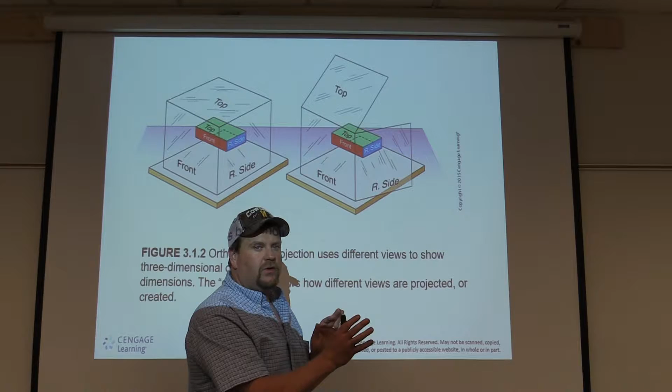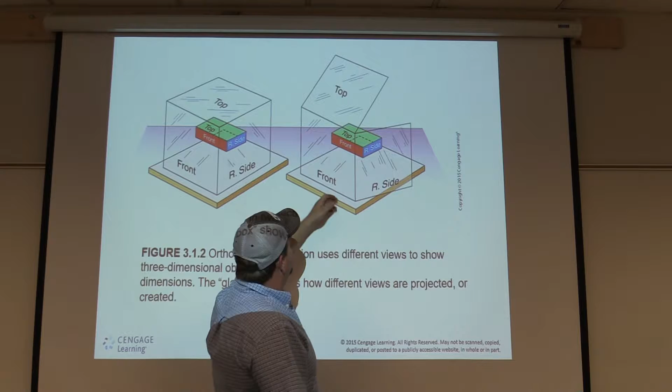Flat dimension like this. We have 3 different views. But now we're going to help explain how we get to that 2-dimensional print. Okay? So that's where the orthographic and the glass box theory comes in. Okay? So the glass box shows how different views are projected or created. As you can see, we have 3 different parts. We have a top, a front, and a right side.

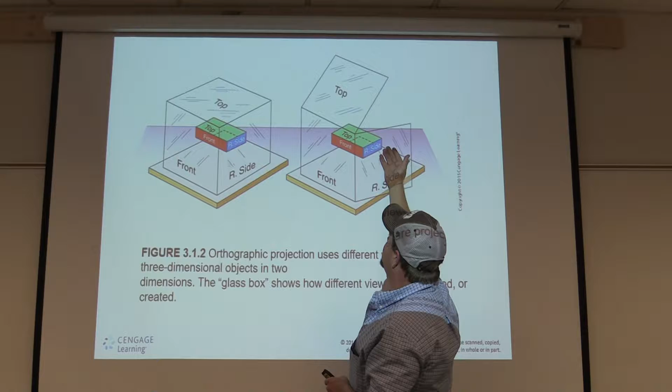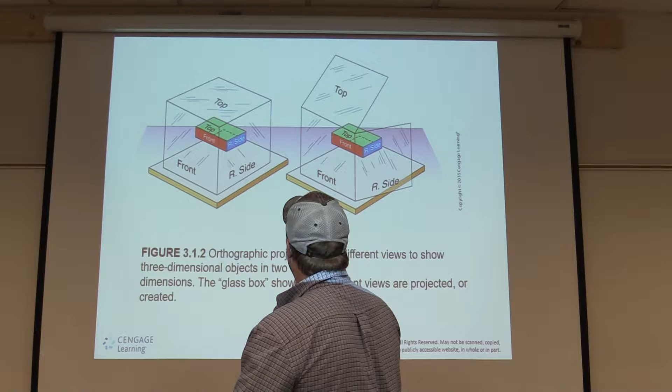So if we were to fold that glass box up, now it becomes 2-dimensional. Okay? And the front will come to the front glass. Your side view will come to this side. And the top will be displayed on the top section. So it's a lot easier to describe that in that manner than it is to sometimes have to turn a print around or have 3 different sets of prints.

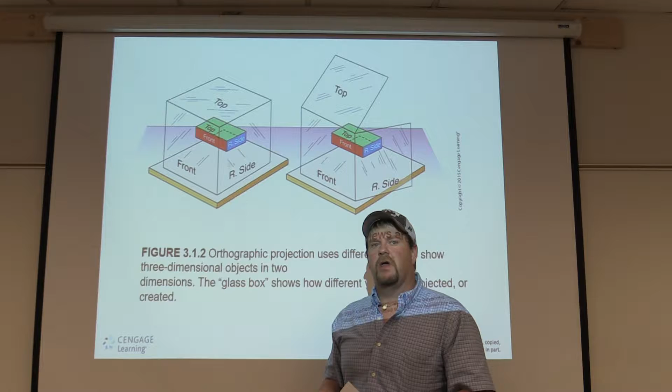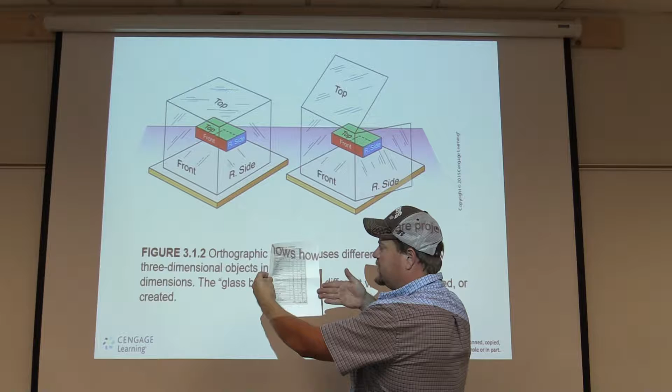Because you might have to look at the top, the front, and the side all together, and if you're constantly switching back between 3 different prints, it can be very confusing and waste a lot of time. So we have this box here. All we basically do is fold it up, so now it becomes 2-dimension, and this piece would fold out the same way as this. Okay? Now we just made it a 2-dimensional piece from 3 dimensions. That's all our glass box is really.

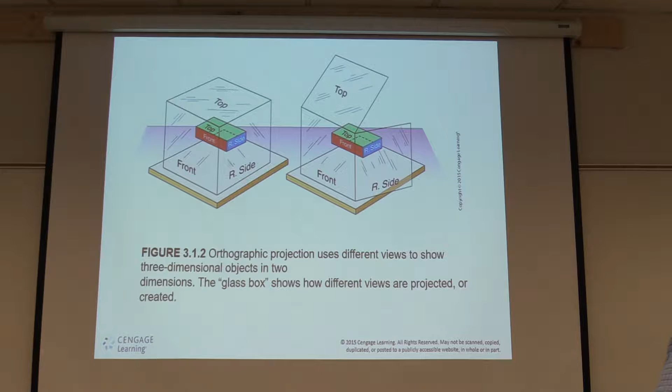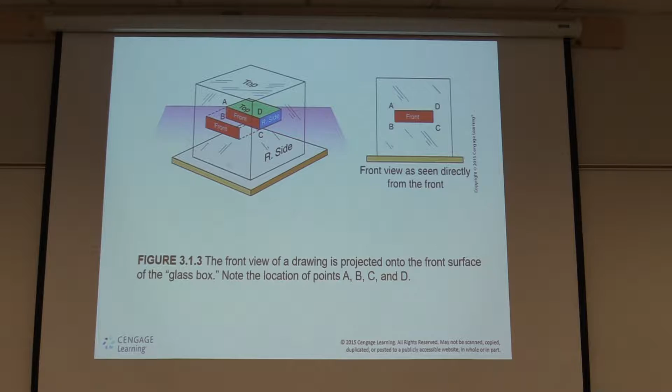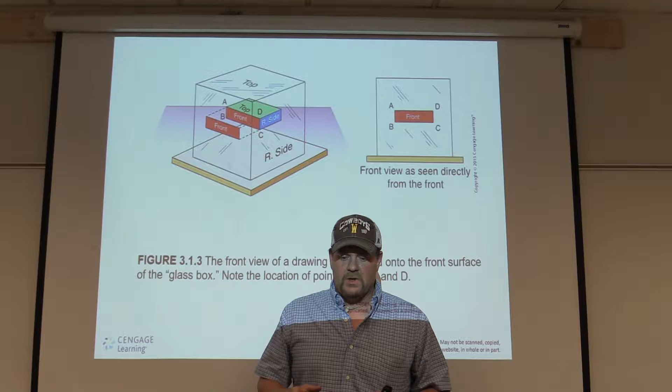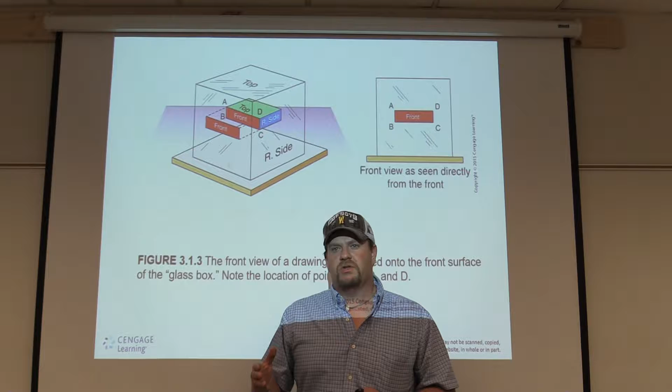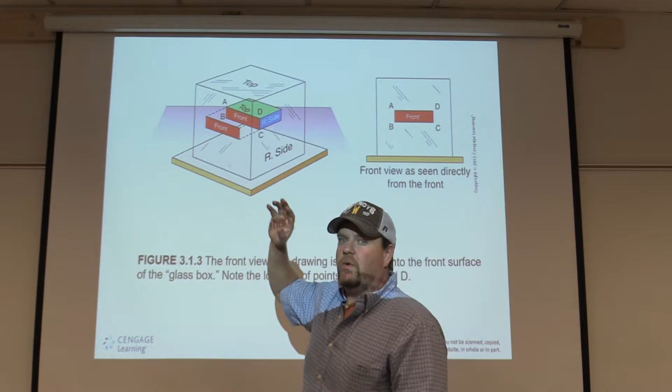So especially when you start reading prints, there's a million different methods out there. A lot of people have their own little tricks and so forth. What I really want you to focus on is just staying consistent. Okay? The more and more you read prints, you'll start to understand different portions of it. So I almost always start in the bottom right-hand corner. I'll read my title block, start making sense from there, and then I will go up and I will start reading. I read my front view first, then my top view, and then my sectional view or my side views.

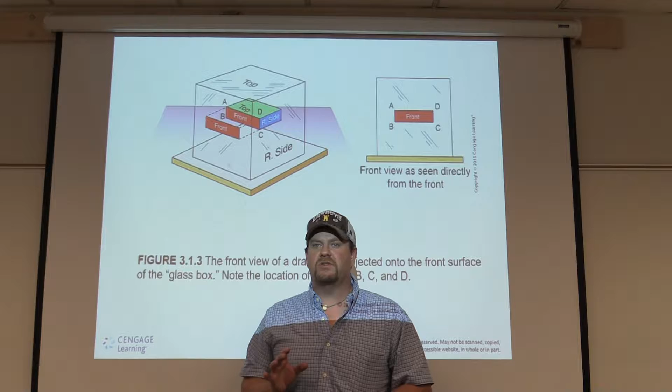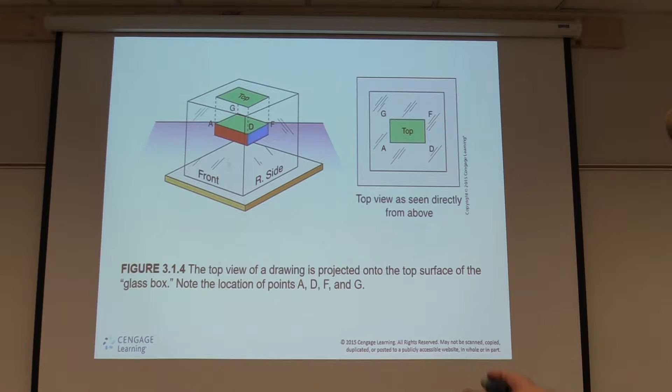I don't really care if you do it side view, then top, and then bottom. What I want you to do is just be consistent. The more and more consistent we are, we create our own habits. And as long as that works for us, that's fine, as long as we're getting the correct information. Okay? Here's just another example of the object's top surface being projected to the top of the glass box. Side, same thing. I think we understand that portion fairly well.

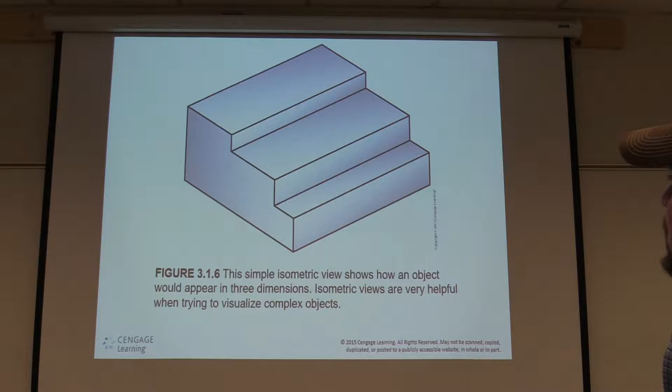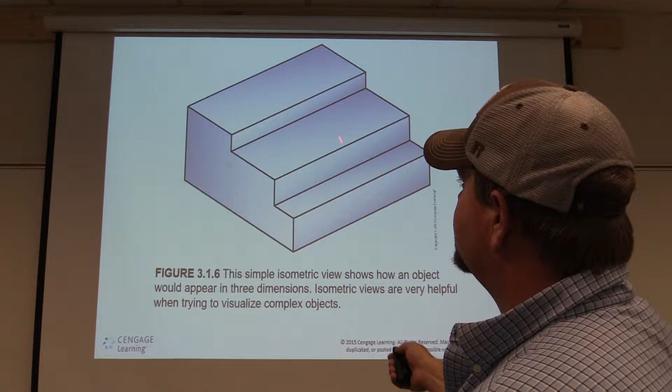This was just showing you a simple isometric view, shows how an object would appear in 3 dimensions. They're very helpful when you're trying to figure out what it's supposed to look like. Because from this spot over here, you have to be able to visualize this portion. And a lot of the prints now will give you an isometric view first, or another sheet with an isometric view, and then you will get your 2-dimensional view as well. Don't you agree, Dan? Yeah, and one other thing too is sometimes you will get an assembly drawing with your packet of prints, which helps to be able to visualize just where this part's going to fit in the tolerances required.

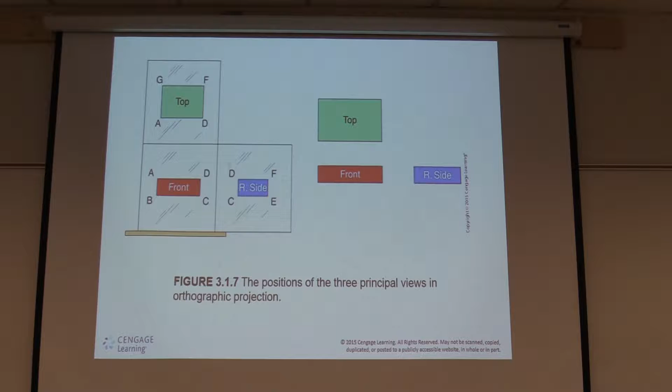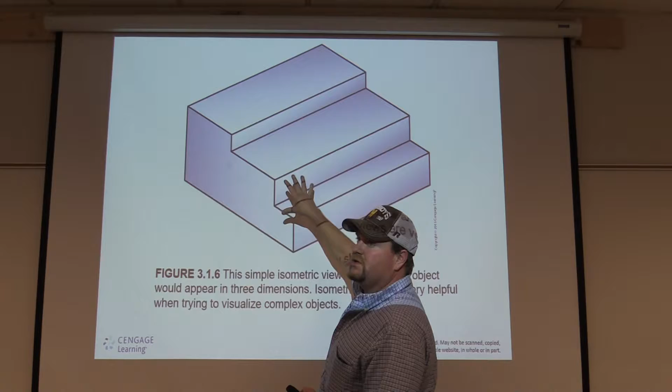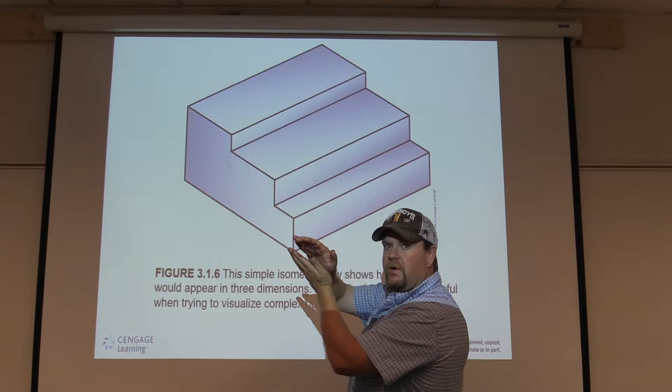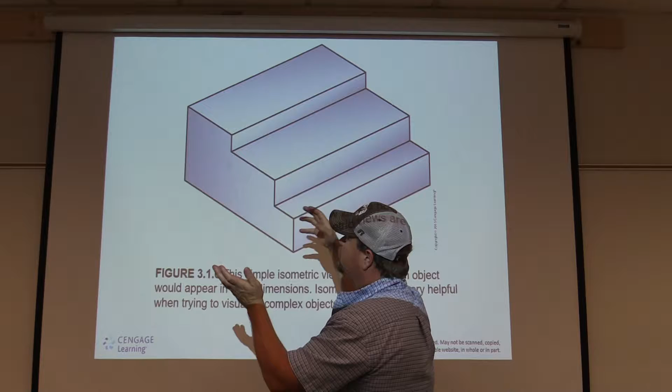Okay. So, example, what Dan's saying is this is just one portion, right? So now say there's 2 of these, and they're designed to fit together so that you have 2 pieces and one of them fits on top. And say they're a shifting block or a bearing, floating bearing, so to say. Okay, these may be made out of Teflon, and they're designed to glide on each other. So Dan's saying that what you'll get is an assembly view or print as well that will show you how these 2 pieces are supposed to fit together. And then you'll notice that you might start seeing differences like tolerances in between as well. Okay?

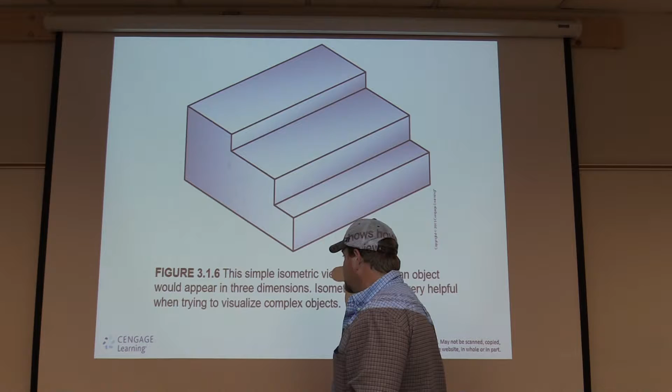All right. Let's move through this section. Let me take a look here.

So feel free to read through your book. Page 204, 205 talks about the glass box. Shows how different views are projected. We are over on page 206 now, on the view arrangement, which is the top right-hand column of that page.

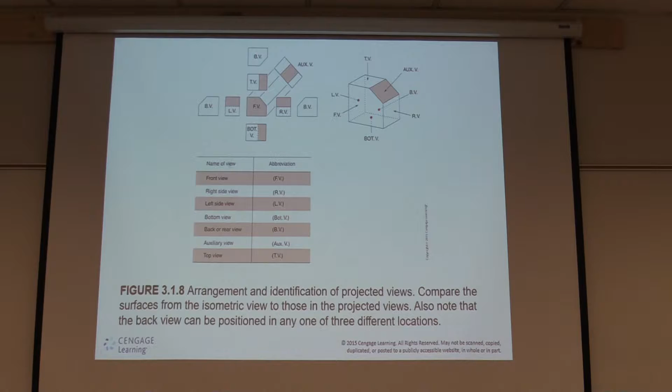Okay, so what it says here is after the views are created through orthographic projection using the glass box method, the hinged box sides are opened completely to show the position of the three. So that's what it's trying to show you here. Okay, let me zoom in a little bit. All they're doing is just unfolding this box.

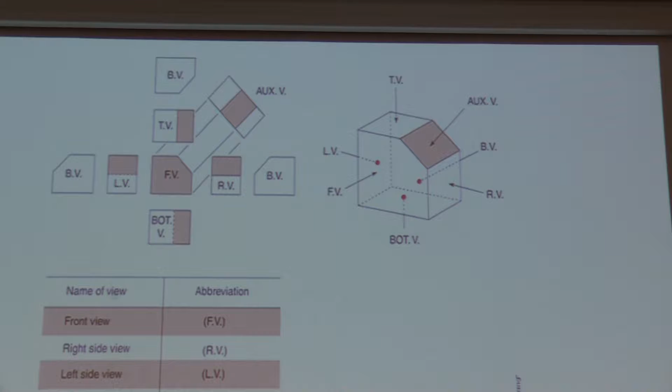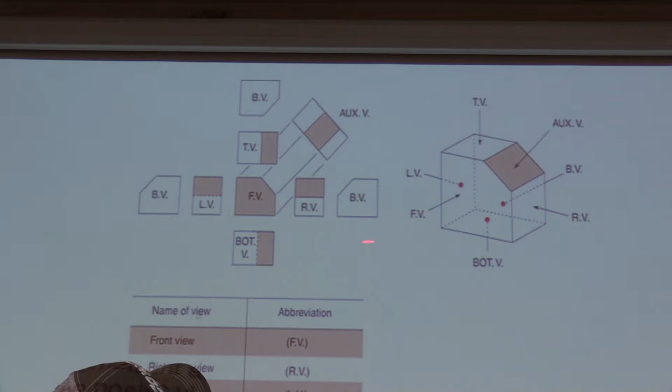We've got our right hand side, which is our isometric view. Here is showing our unfolded section as well. Okay, so as you can tell, here's your front view, this piece. Okay, top view here, and then it's giving you a portion of this which is shaded. Left hand view on the back side, BV on the back view.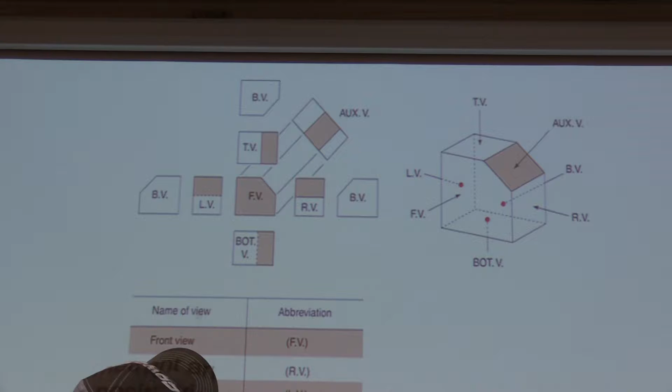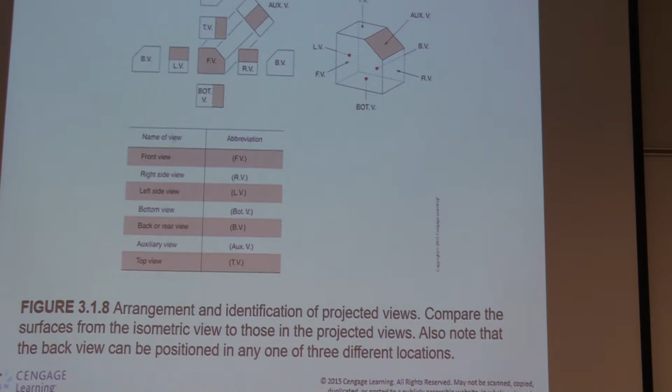So you have to learn how to look through this glass box here and recognize that this BV is actually on the back side, the opposite side of FV. Okay? All right. So now let's start getting into some actual prints. Okay.

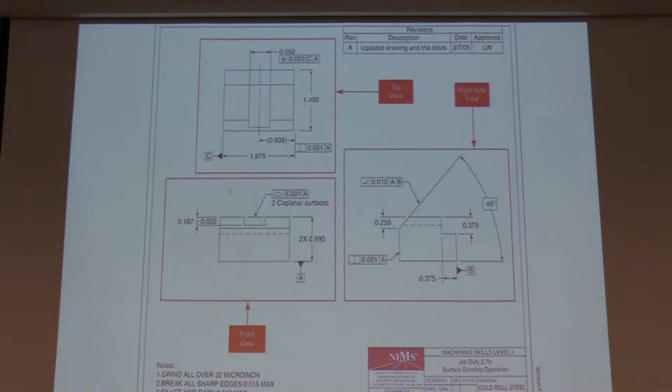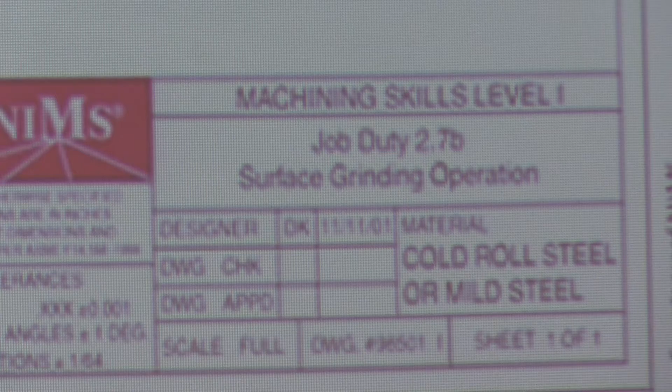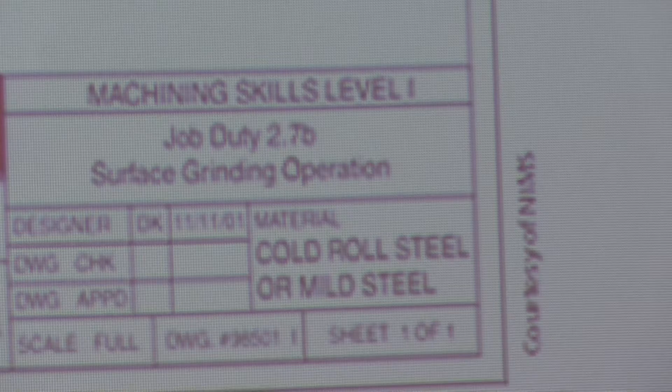First things first, let's look at our title block. What that's telling us. Job duty 2.7b, surface grinding operation, cold rolled steel or mild steel. Designer is DK 111101. Full scale. Sheet 1 of 1, so there's only one part to this print. You may get 5 of them like we were talking about. 1 might be your two-dimensional, 2 might be your isometric, 3 might even be an assembly portion.

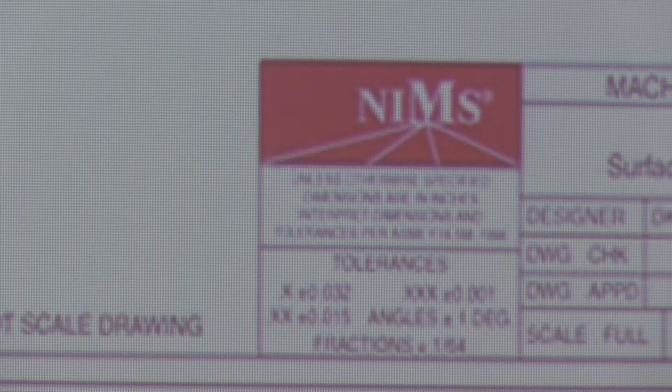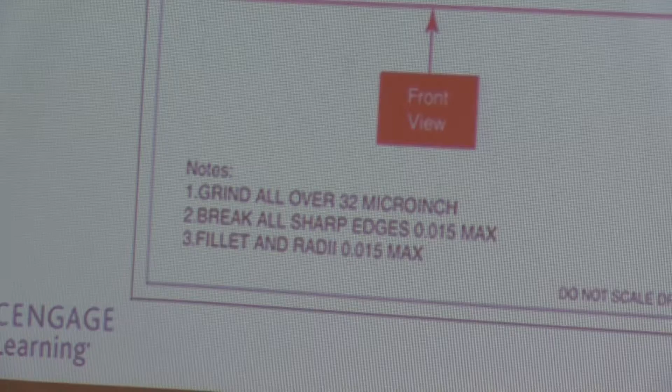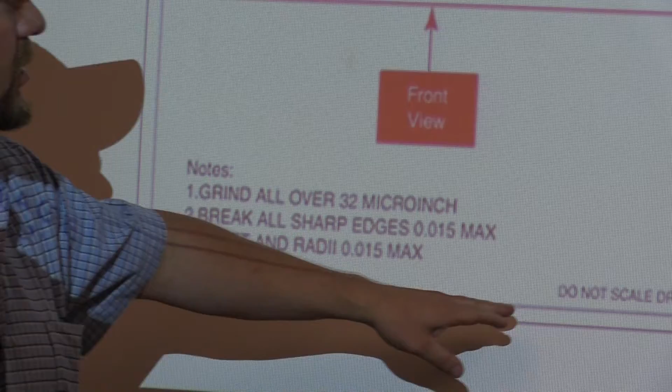Here's our tolerance box that we worked with a little bit ago. Okay. Over here. So the way it was described to me, which I always thought was really good, was the big print giveth and the little print taketh away. Do not forget to read the small print, your notes. Right here in this note, right in the center. Do not scale the drawing. You're reading the measurements off of the print.

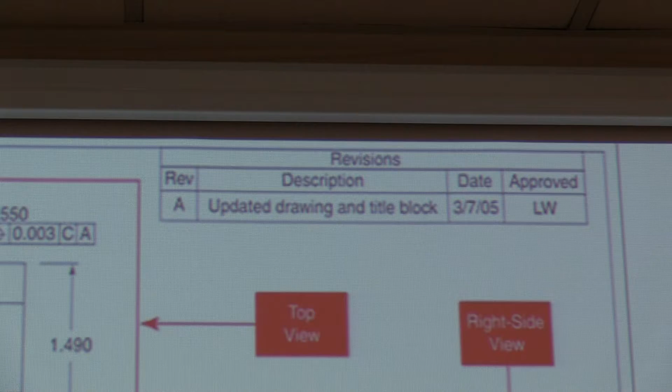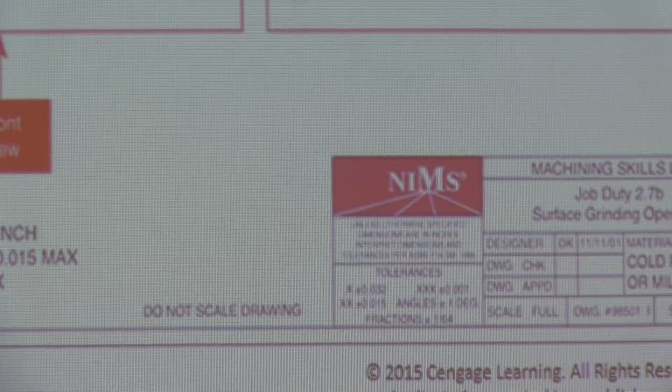Okay? We come up here to the top. Same thing. Updated drawing and title block. It was revised in 05, approved by LW. So for some reason, the original designer was 01. 4 years later, they did a revision to this. The original print, going from there.

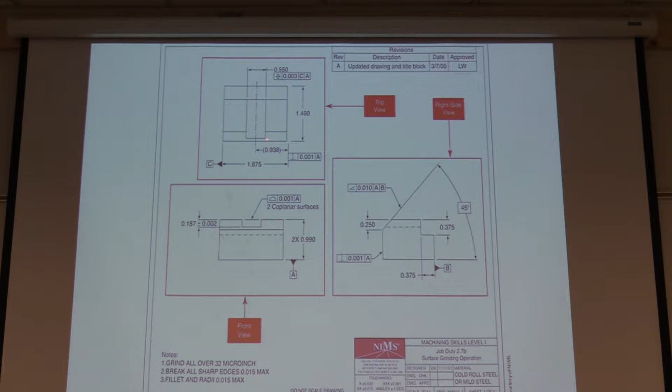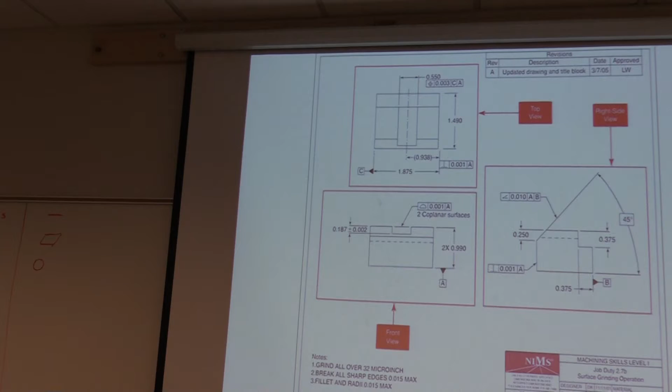Okay? So what it's showing here, left-hand column is the front view. Okay? Right-hand side is your right side view. Your top view here to the top left. Okay. So real quick, let's break down a few of these parts since we're here. We'll start here at the front view.

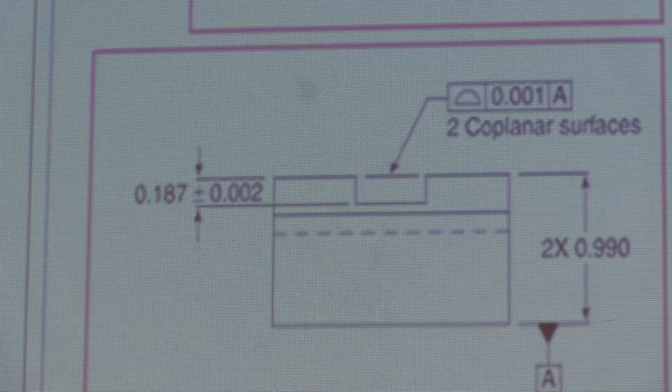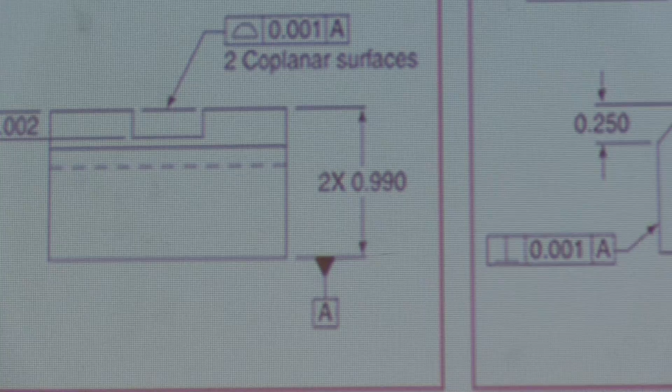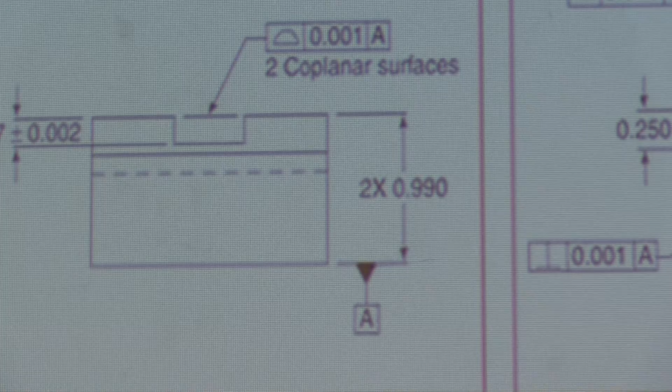Okay, you can see on the left-hand side that dimension is 0.187 plus or minus 2/1000 of an inch tolerance. Okay. 2 coplanar surfaces, 1/1000 of an inch as well. This side over here, 2x 0.990. So that means 2 times, 2 sides are going to be that exact dimension. Okay? So, 2 sides. This side and this side. Help clarify that. Okay.

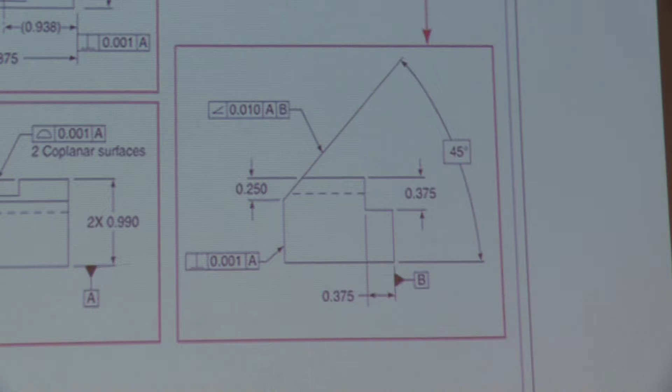We'll get into the hidden lines and everything else here in a few minutes. But we're just starting to try to break down the individual prints as we're going through this PowerPoint presentation. And the more you see of it, the more and more it'll help you understand as well, okay?

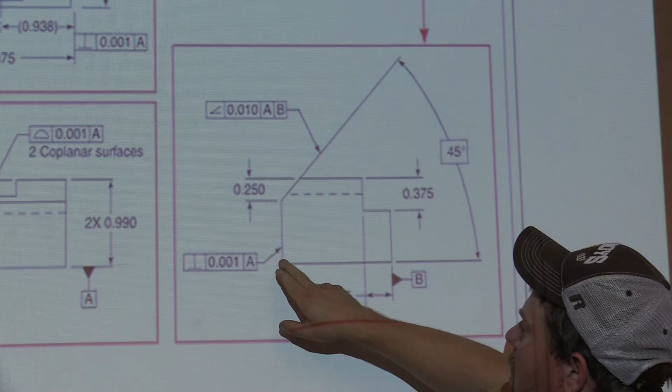So as we can look on this right side view, okay? First things first, start at the top or the far right. We're at a 45-degree angle between here to here, okay? Now, I know it doesn't come out here to this point. That does not matter. This angle is still 45 degrees all the way across, okay?

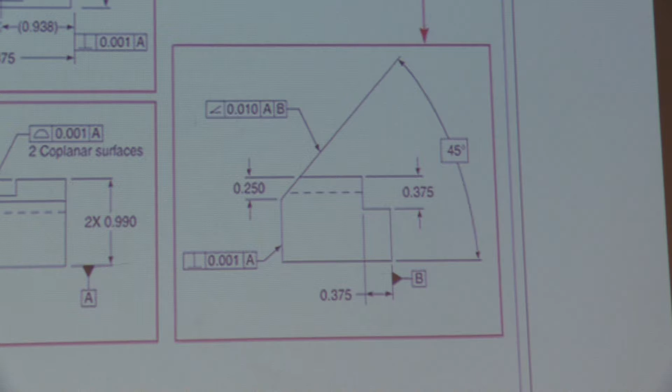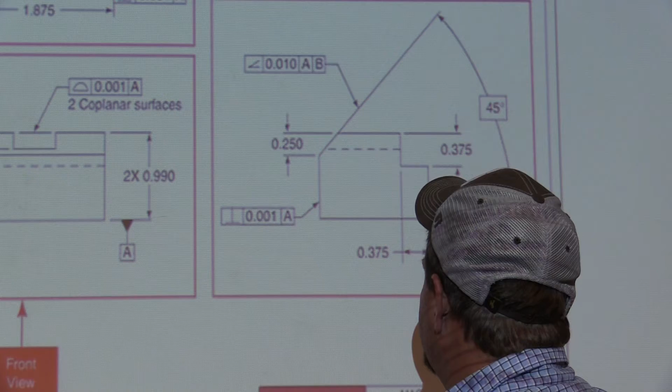Break it down here to the steps in the center. They are both 0.375 inches. It does not give us a plus or a minus on that. However, if we go down to our tolerance zone, part of our title block, we're at 1/1000th of an inch plus or minus. So we could be 0.376 down to 0.374, okay, on both of these sections.

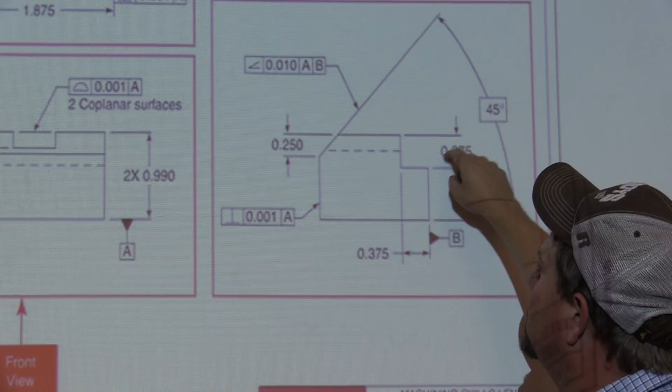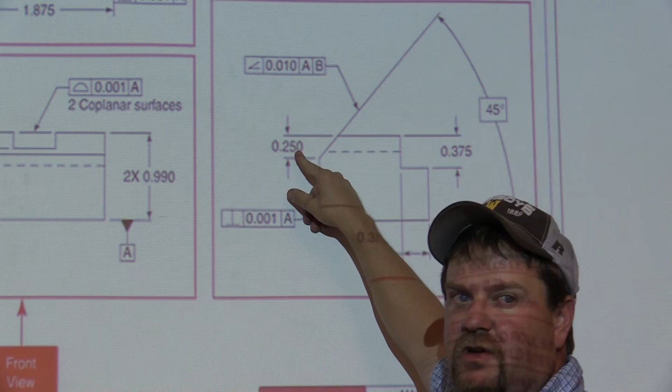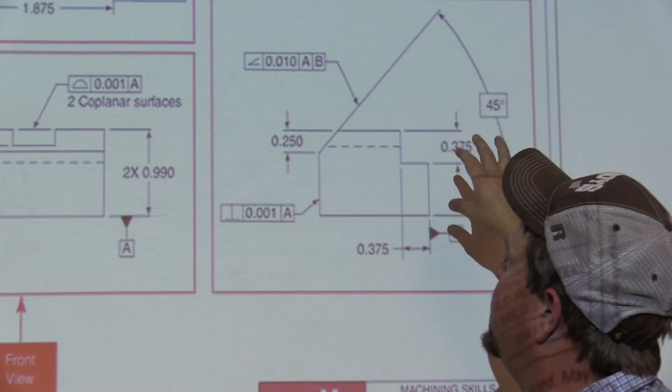Same thing here. Our measurement from this point to the top of this is going to be 0.250 plus or minus 1/1000th, so 2/1000ths accumulation from 0.249 to 0.251, okay? All right. We'll get into the feature frames here in a few. I don't want to confuse you with those quite yet. We'll eventually get there. I just want you to kind of be comfortable with the actual blueprint portion to start with before we start breaking down the feature frames, okay?

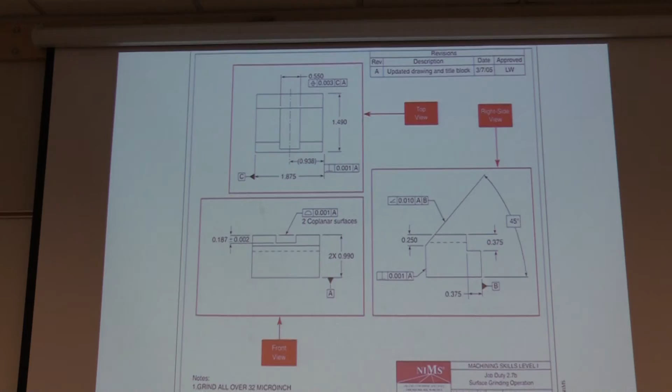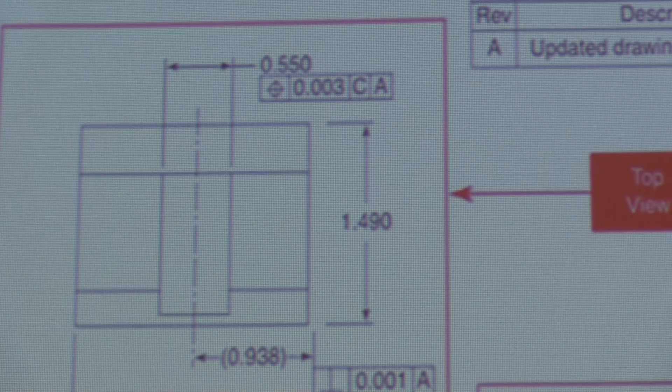All right, let's look at the top view. We can see the center, 0.550, same thing, 3 decimal places plus or minus 1/1000th, okay? Right-hand column, 1.490, top to bottom, 3 places as well, so the tolerance is 1/1000th of an inch. I think we're kind of getting the hint of it. Again, repetition makes you much better, more comfortable by far.